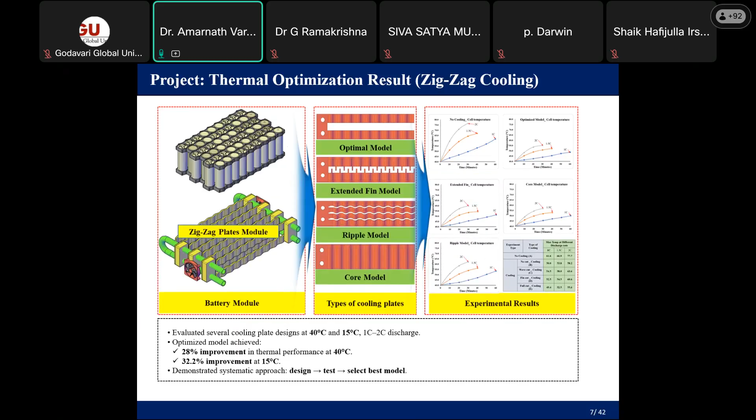Okay. And I also have one more patent, which is a cooling system, the battery thermal management system. Nowadays battery thermal management is the benchmark and backbone of the battery pack; we need cooling systems. I developed and patented this one. This is also a cooling system, a battery thermal management system.

Okay. And I also developed a battery aging prediction system. So you know, nowadays in Korea, I don't know about the India side, in Korea and some of Europe, battery aging prediction is divided into 2 types. One is the physical type, the other is the chemical type. Physical type means we check the battery charging, discharging, and DOD.

And coming to chemical predictions, we use the anode and cathode and check how they degrade. But these 2 methods are inaccurate. We can't give an exact prediction with these 2 because of complex loads. It won't work. That's why we are applying a new technology, the hybrid battery aging system. In this hybrid battery aging system, we adapt the physical and chemical and combine these 2.

So physically, we look at the DOD pattern, how capacity fade happens, and how internal resistance is rising. We identify the physical side, and on the chemical side, how the anode and cathode degradation happens. So we combine these 2, and then we can predict battery aging accurately and exactly. Okay.

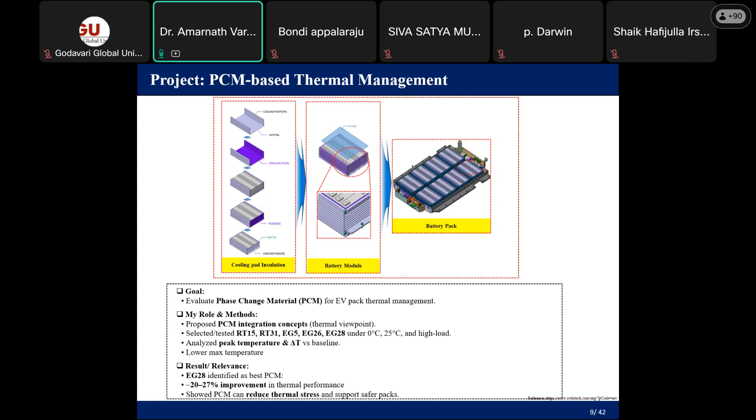And I also developed a micro mobility battery pack for two-wheelers. During my Indonesia MOU, I developed a 2.5 kilowatt battery pack, tested it, and we successfully operated this battery pack, and this project got an A plus. In this project, I developed a 2.5 kilowatt lithium ion battery with a thermal management system and high current density, to increase the mileage of the vehicle. That is our main concept.

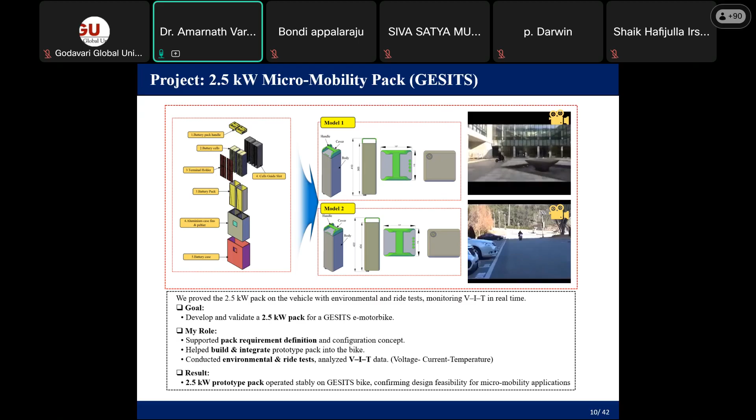Previously, the vehicle mileage was 50 kilometers, but we increased it up to 120 kilometers with the same battery capacity. That is our main technology. We implemented, developed, and tested this one.

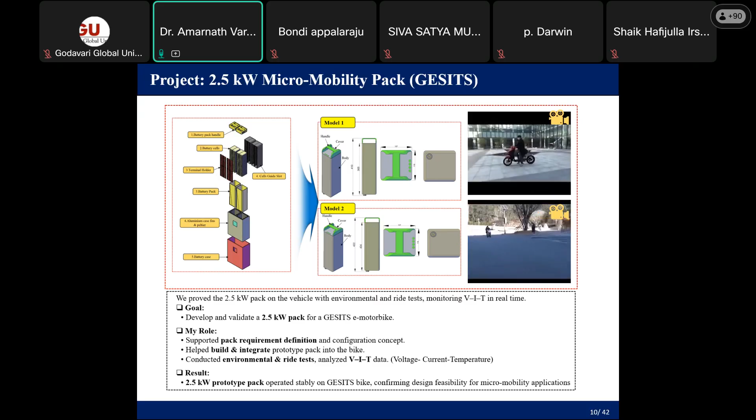So coming to some of my other projects. I developed the steer by wire. Steer by wire means there is no need for any steering column in between. You can see here, there is no steering column. It is operated by a wire only. We are operating by wire only. In this case, we can effectively prevent accidents and complexity. The main technology we are developing is steer by wire.

Then I have also developed advanced manufacturing, that is the KUKA robots, pick and place robot. KUKA robots we are operating for the milling operation. In South Korea, only we have this KUKA milling robot operation. In Europe and the USA they exist, but in Korea we are the first to operate like this. And also I have much more experience in reverse engineering. We are scanning the vehicles or any equipment, and then we can...

Sorry. Dear participant, please mute yourself. Okay, sir, you can continue.

No problem. Okay. So reverse engineering means we scan and develop the mesh, and after that we develop the real model. This is our main concept for this one. This is reverse engineering, so it is nothing but additive manufacturing. So I have good experience in additive manufacturing.

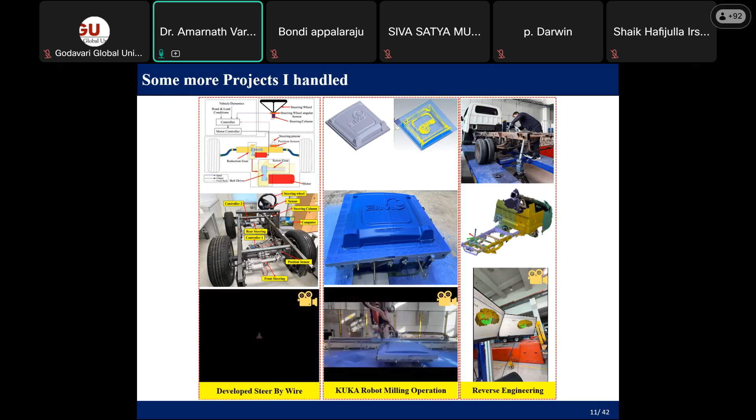And also I developed the smart fish farm. Nowadays most aquaculture is the earth pond type, but for the first time we are developing the vertical aquarium. I have a patent on this one also. Vertical aquarium means we are farming the fish tanks vertically, growing the fish, and there is no need for any human interaction with the aquaculture system. Humans can be away from the field, stay in another place, and monitor and control it.

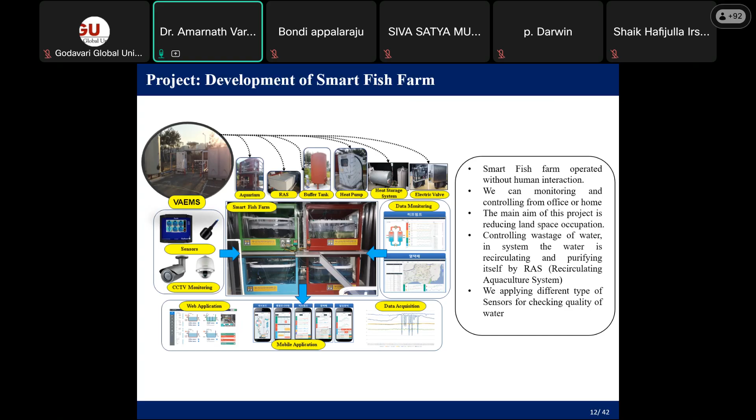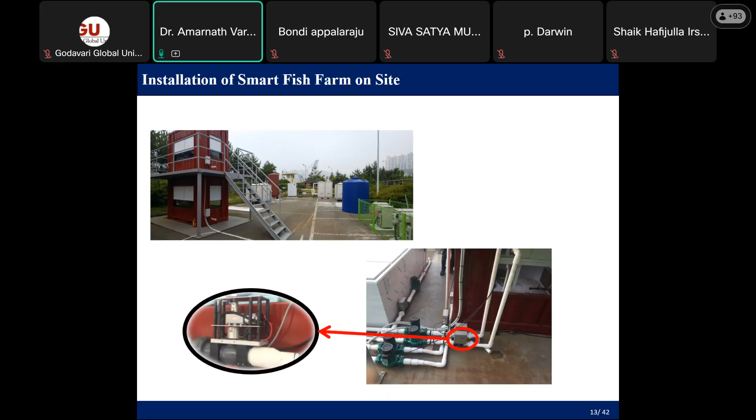For this we also got the A plus project. We successfully installed it on land provided by the government. We installed it, successfully operated it, and successfully finished this project.

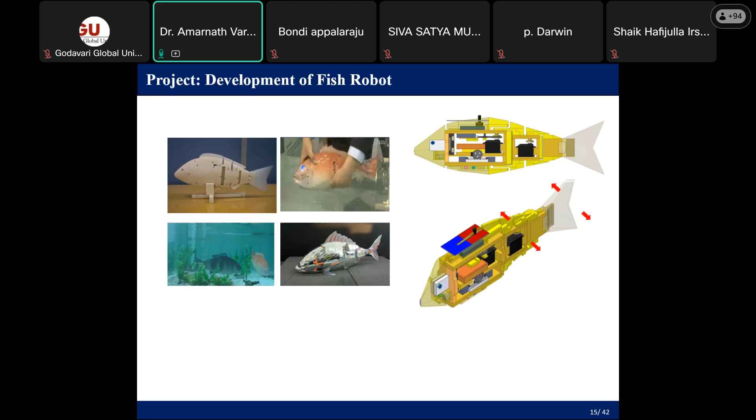And I have one more project: we developed the fish robot. The fish robot can monitor sludge or some unwanted things in the deep water; for monitoring purposes we have developed this RoboFish. Since my masters, with my colleagues and my professors, we have been developing these systems. Here we can see the fish motions. We are applying different kinds of technologies and algorithms for controlling the fish, operating the green band like that. Okay.

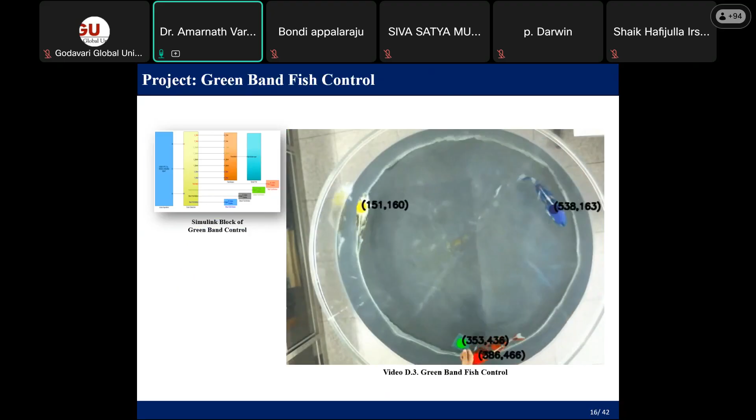So up to here, I explained my research work. Now we are going to electric vehicle technology, how we develop electric vehicle technologies. When we want to develop an electric vehicle, we need some important notes. First of all, define the purpose. What is the purpose for which we want to develop the electric vehicle? Either agriculture based, passenger based, special purpose, or heavy duty. So we should define the purpose, and after that select what type of vehicle we want. For example, what type of powertrain is very important: pure electric vehicle, hybrid electric vehicle, or range extended vehicle. Everything is different with respect to utilization.

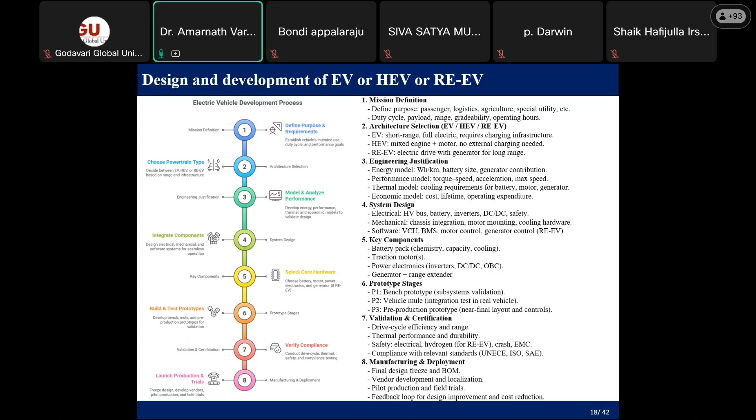Actually we are planning to develop a REV, meaning range extended electric vehicle. When we want to develop a range extended electric vehicle, first of all we want to know what it is. If you go for pure electric vehicles, they run by motors only, there is no other source besides the battery. When the battery is finished, the vehicle stops.

If we are going for the hybrid electric vehicle, it is nothing but it is run by either engine or battery. Okay, that is the main purpose we are using the hybrid electric vehicle.

So coming to range extended electric vehicle, which is nothing but it is purely electric vehicle, but we are always recharging the battery using the IC engine. So there is an IC engine. The IC engine is run. When the IC engine is run, it is attached with the generator. The generator will be generating the power. This power is going to the battery, then the battery drives the motors.

Okay, it is continuously running. When the battery is full, the engine will stop. Then it can be run by the battery. When the battery is going down, then automatically the engine starts. Then again the generator will be generating the power, then the battery will be filled. This is nothing but a range extension electric vehicle.

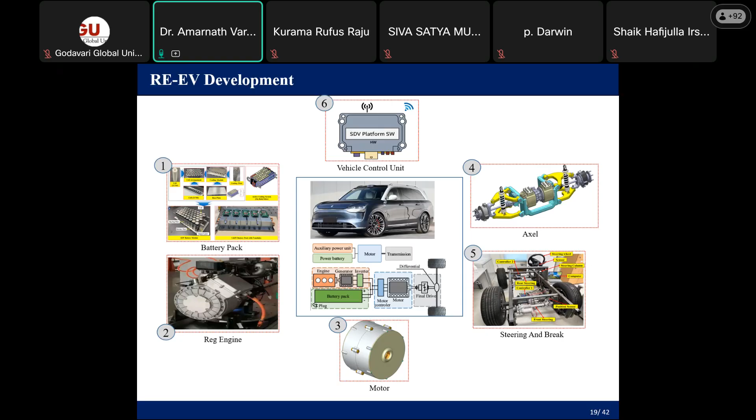So now I am doing this project in my company. Okay, so in this project I'm mainly participating in: number 1 is the battery pack, number 2 is the engine with generator, number 3 motor, number 4 axle, number 5 steering system, number 6 VCU, vehicle control units. So I will explain here step by step about these things.

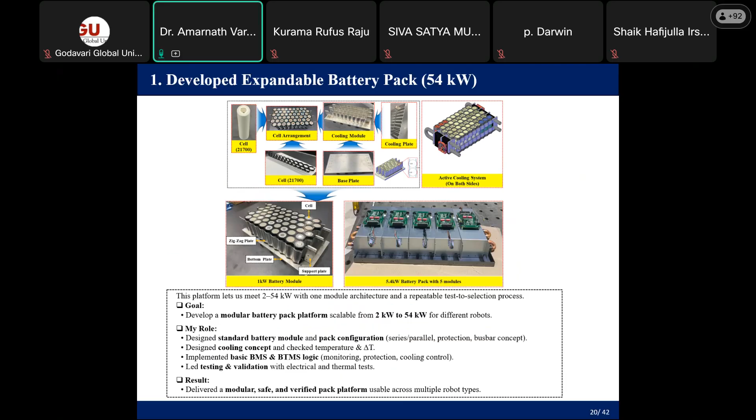Okay, so first of all, expandable battery. Already I explained previously about the battery pack. For this vehicle we are using a 54 kilowatt battery pack. So it is always filled by the engine. Okay, so next we will come to the second one: we are choosing the engine, that is the hydrogen engine. Why are we choosing the hydrogen engine?

So we know nowadays vehicles are classified into two types. One is the IC engines, another one is the electric vehicle. IC engine is running with petrol or diesel. This petrol or diesel is fossil fuel. This is purely run with engine. Okay, this causes pollution because it is operated with fossil fuel.

Okay, coming to electric vehicles, I'm using the hybrid electric vehicle. How is the hybrid electric vehicle operating? A hybrid electric vehicle has a battery and also fossil fuel. Then it has an engine and a motor. It also has some pollution because it is sometimes run by the engine. Coming to plug-in electric vehicle, plug-in electric vehicle is also like a hybrid electric vehicle.

There is no difference. Okay, if you are going for the electric vehicle, it is purely run with battery and motor. It has no pollution, but it has some restriction on the mileage. We can operate only some restricted distance. So if we want more, we should recharge. Recharge means, sorry.

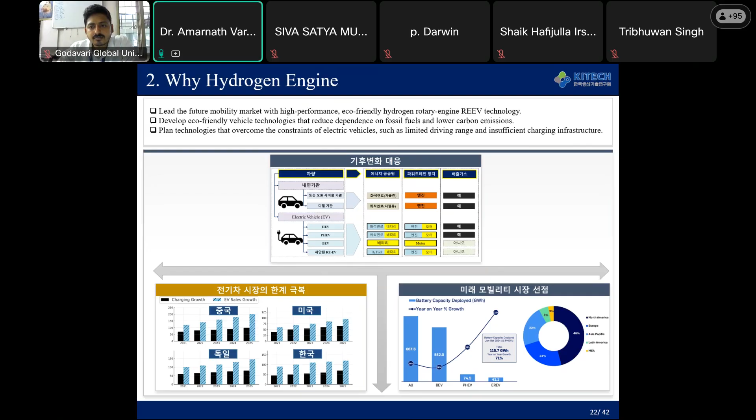Okay, so first of all I will give why we are using hydrogen. For example, IC engines use fossil fuel. It can be depleted anytime, and the output is nothing but carbon dioxide, which can be harmful. Compared to an electric vehicle, the combustion efficiency is only 25 to 30 percent, so we are wasting most of the fuel in this case. The remaining goes to exhaust as CO2. So if you are coming to hydrogen fuel, it can be zero pollution.

Combustion efficiency is 60%. Also, noise and vibrations are very low. It can be sustainable renewable energy. That's why we are going for this here.

Then we have another question. Some people may be thinking, why are you using the rotary engine? Rotary engine is not good for efficiency, mostly they are thinking like that. No, if you apply the rotary engine with the most load and long time, it can give bad efficiency. But if you use less load and less distance, less time operation, it is very powerful and gives very good efficiency compared to IC engines. That's why we are going for the rotary engines.

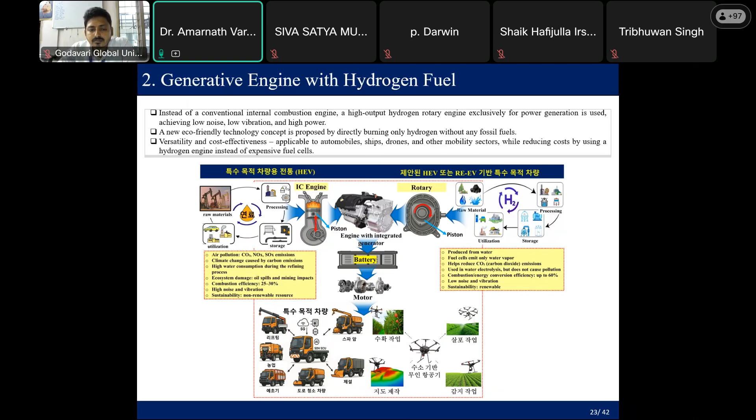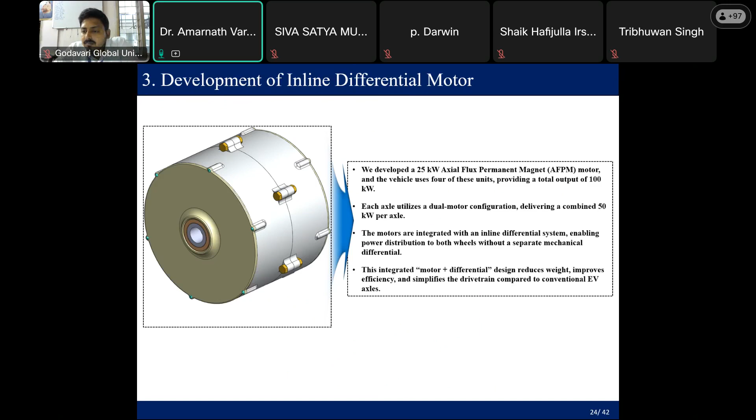So number 3 is the motor. This motor has some special features. Nowadays a motor is nothing but we develop the stator, rotor and shaft, and connect it to the wheel. No, this motor is purely developed with inline differential. Inline differential means, as you can see here, there are 2 motors.

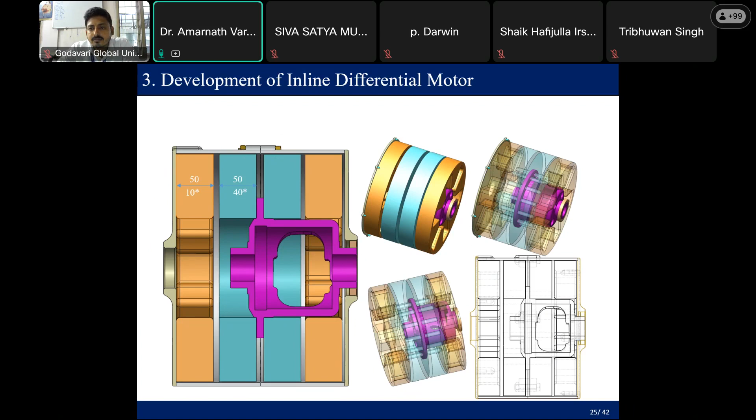This is the stator rotor and the stator rotor, there are 2 motors. This is 2 motors with differential, meaning the complexity is very less, and it can also give very good efficiency compared to the normal differential. That's why we are developing this inline differential motor.

We have already developed this one. You can see this is the inline differential, and this is the differential motor. I won't show my motor here because of some company restrictions. I will only show some rough things.

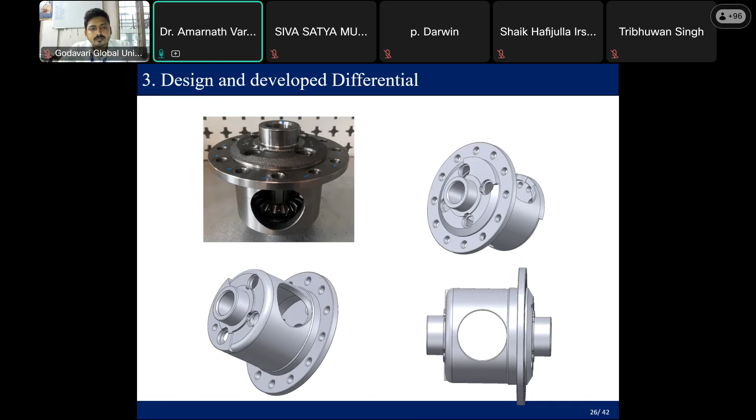After that we can go for the axle with suspension. We have 2 types of axle here. Model 1 is the reduction gear and motors, which we normally use with the double wishbone suspension system. The other type is our inline differential motor. This is our model. We have developed these 2 models now, and they are under processing.

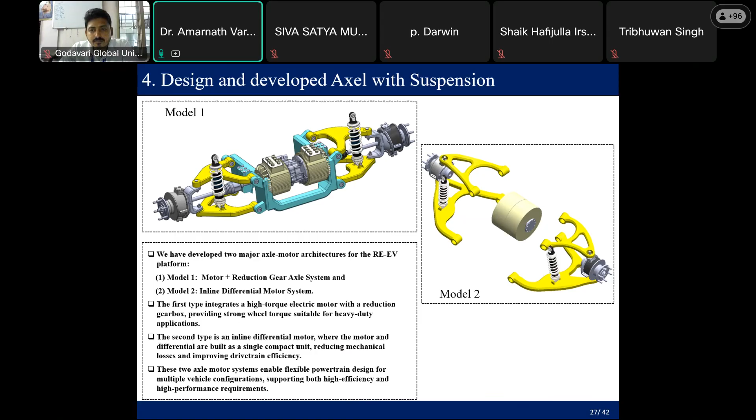Then number 6 is VCU, vehicle controlling unit. This is a very important and hot topic nowadays. This vehicle controlling unit is adapted with SDV, meaning software defined vehicle. What is the software defined vehicle?

We know that every day in human life we use mobile phones. What is the purpose of the mobile? We use mobile for contacting other people, for camera, gaming, calculators, movies - everything we use the mobile for. Meaning one phone, different applications. There is one phone, but there are different applications.

Like that, we are coming to common hardware but multi functions. For example, sometimes I'm using the ladder type, sometimes I'm using the 3D printing type, sometimes agriculture purpose, and sometimes woodcutter. So nowadays mostly these special purpose vehicles, each function requires each vehicle. In that case, every function requires one vehicle, but our technology is one vehicle, multifunction, meaning we can reduce the quantity of vehicles while the functionality of the vehicle is huge.

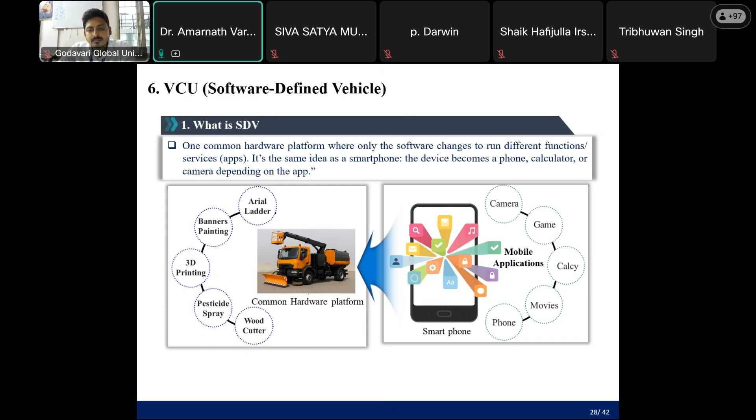That's why we are developing the software defined vehicle. Software defined vehicle means the hardware is the same but the functions are different. So what type of functions are common in this?

The common platform is used for hardware standardization. We don't use multiple hardware for multi functions, it's just a software API standard. For example, we have different apps, I want to use it for gaming, I just install one app and I can play games on my mobile.

If I want to use a bank account, I can install a bank related app and use it for bank purposes. Similarly, if I want to use it for a sweeper, I just install the sweeper related app.

Just a small hardware change is needed. For example, for a sweeper, we can attach some motors, that's it, and it can operate as a sweeper. Like that, and it can always be used.

OTA. OTA means we can communicate data with the vendor and the vehicle, they can communicate data.

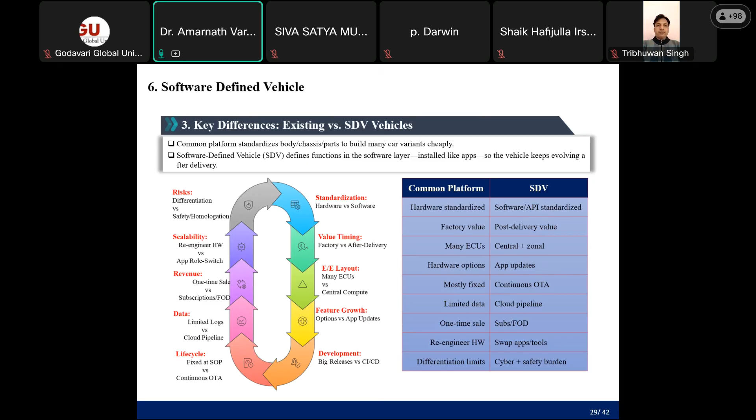Coming to this, software defined vehicle, why we are making special purpose vehicles, as I said previously.

Normally for ladders, commonly two people are used. One person stands on the ground and another person is on the ladder. The ladder person gives instructions to the ground person, please move left side or move right side, you can move up.

It can be some strange situations. Sometimes he operates wrongly, then it can be a hazard for the ladder person.

So if we update this with SDV, software defined vehicle, it can be operated by one person. There is no need for an extra ground person. He can monitor and use the joystick for everything. He can operate and achieve the target very easily. That is our main thing here.

Also, one more thing is reducing the risk. How do we reduce the risk? Actually every ladder operates at a certain height and certain angle. If it goes beyond this angle, the load is undistributed, and it can fall down.

But when you update this with software defined vehicle, it can be restricted to a maximum height, and restricted to the required angle. More than the required angle it gets restricted, more than the required height it gets restricted. So within these parameters we can use this.

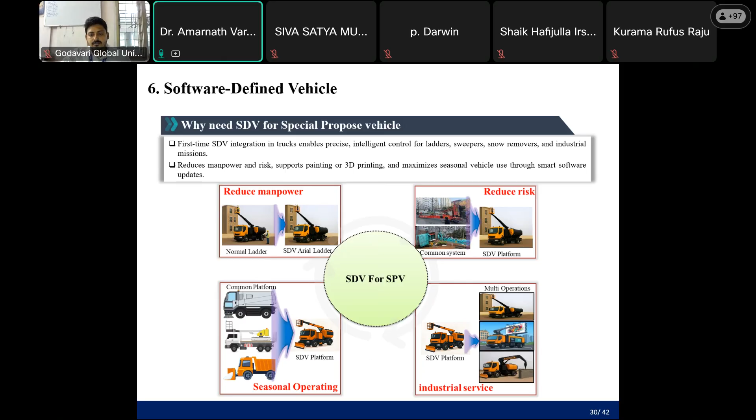From this point of view, some people have questions: how do we update the program? For example, I have...

So OTA means nothing but, over the air, we can communicate with the vehicle. When needed, the customer updates the app in the vehicle via the mobile, then it automatically integrates with the vehicle, then it communicates with the VCU.

The VCU will be collecting this information with respect to what we require, and the program will be automatically established in the vehicle. For example, you can see the basket here - we can remove this basket and just paint spray here for paint work. If we need the printer, we can remove this sprayer and replace it with a print nozzle, then we can use it for 3D printing. That is our main technology we are developing here.

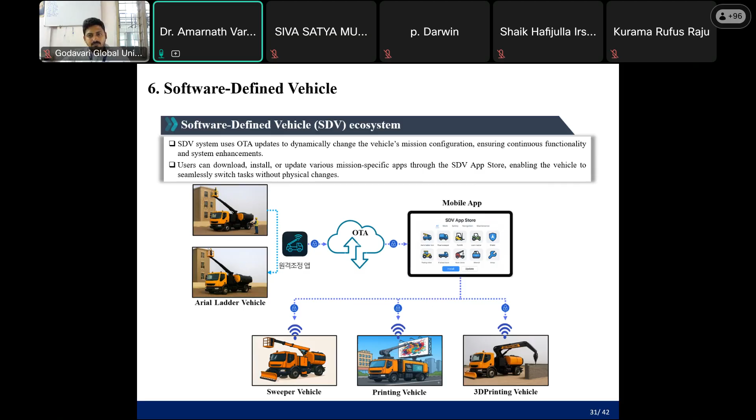Now how VCU is working. Vehicle controlling is nothing but integrated with the app developer, manufacturer, customer and hardware. When the app developer is developing apps, the manufacturer gives commands to the app developer.

They need to develop vehicles with respect to sweeper, ladder, printer and painter. This requirement is provided to the app developer, who develops a program related to this. Then the customer operates with respect to what is provided, updating these things, and they operate the vehicle.

So when this vehicle is operating, the manufacturer will be monitoring this data - how the ladder is working, its life, the spray nozzle life, how the sweeper motors are working, and when using the paint, how the paint arm is working. All this data is monitored by the manufacturer.

If there is any problem, for example the life of the ladder will finish, they will update the information to the customer so they can take the vehicle for service and re-upload or utilize it. Also when the vehicle is upgrading, the manufacturer provides information to the developer, who takes instructions from the manufacturer. With respect to this, they can update the vehicle with different types of things. So everything is run by the VCU, the vehicle control unit.

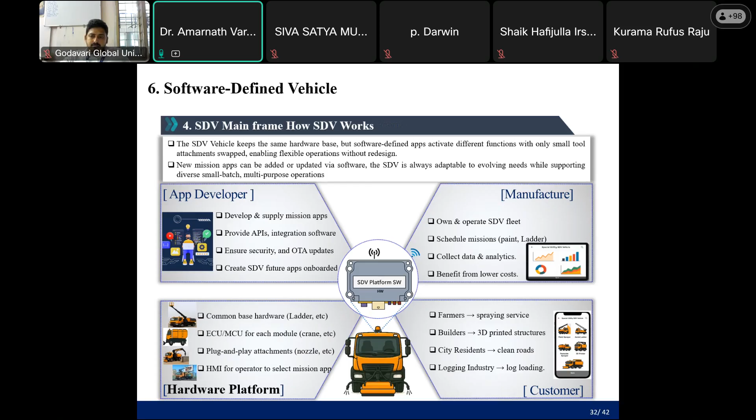Now how the main frame is working, you can see here. The app developer develops what the customer and manufacturer provide, and then the customer operates these things. When the customer operates the app, they can execute it for these vehicles.

So when the vehicle is executed, the sensor data goes to the manufacturer. They can monitor, analyze and update it. If there are any issues, they send a message to the customer, who can take it to the service station where they rectify the problem and continue using it. At that time the vehicle will also be upgraded.

This year we are using an AFPM motor, and next year they can use it to improve the power. Nowadays they use 2 kilowatts, next year they are planning to use 5 kilowatts. Then this data is provided again to the app developer, who implements these things and provides an updated app. Then our customer updates this app and reuses it. That is the main function of this SDV.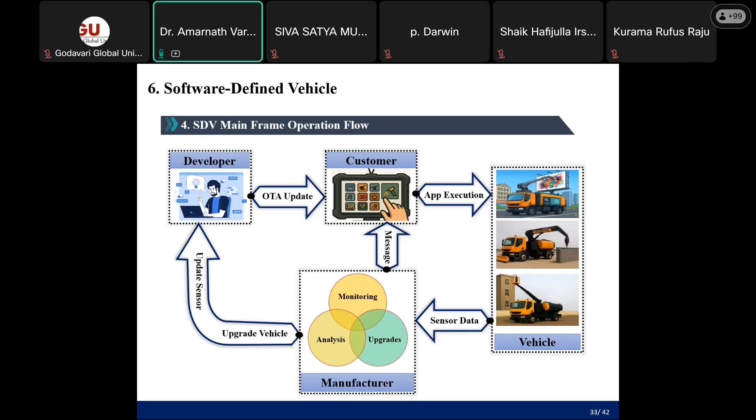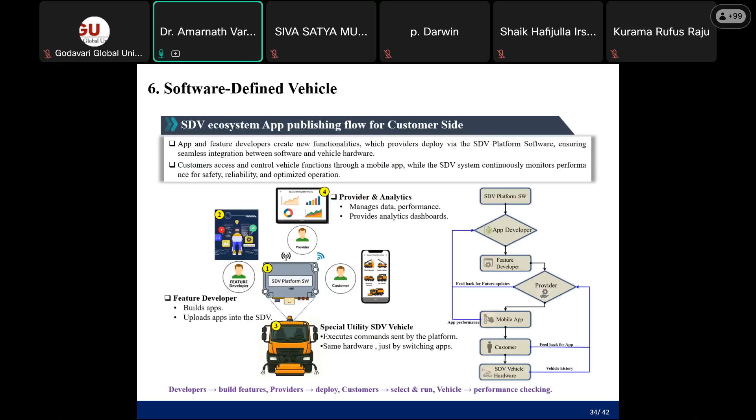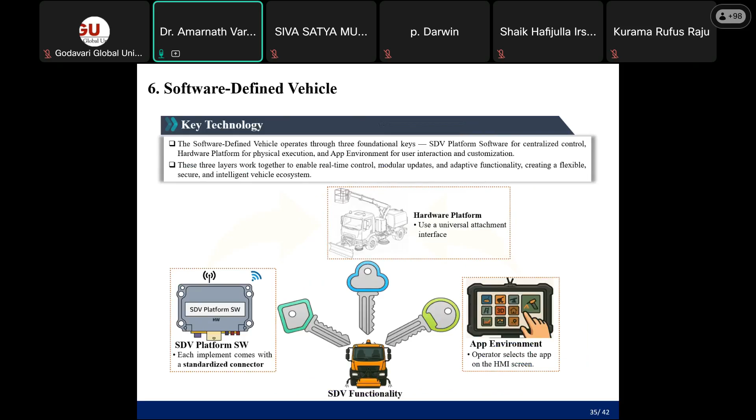Previously what we saw was the client side. Now this is the developer side, how the developer is working - same function as explained previously. In the SDV there are main key functions: number one, development of the software development platform, SDV hardware, and the app. These three are very important for this technology.

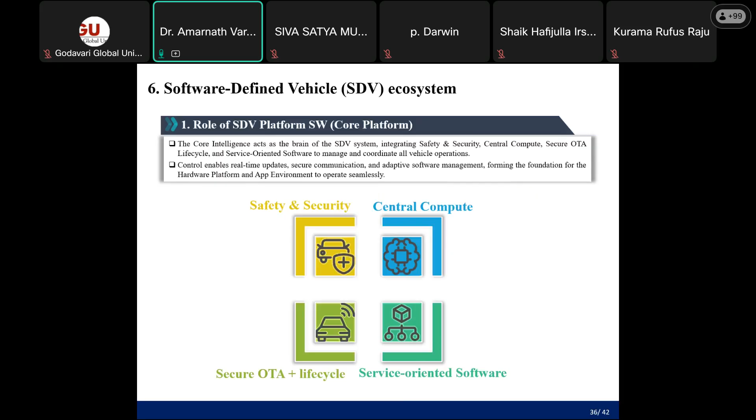Coming to the software defined ecosystem, what we want to do in this system is provide security, centralization, and service-oriented software, along with secure OTA. We can also estimate the life of the vehicle here - this is the role of the SDV platform.

After that, a very important thing is the motor controlling units. Commonly nowadays, if you are using things like a ladder and everything, they use different motors, different switching units, and different controllers - each joint has one motor, one controller, one switching unit. The VCU cannot modify this controller's programming because each controller has a dedicated program. So if you want to change this, you need to change the entire motor, controller and switching unit.

Okay, but our plan is this: this is the normal model, but we are applying it for the SDV. In the SDV technologies, we are using the VCU directly controlled by one controller. This one controller can control the switching and motors. It means we can always modify it under a rechangeable and rewritable program with respect to the VCU, because of commanding the VCU with the controller.

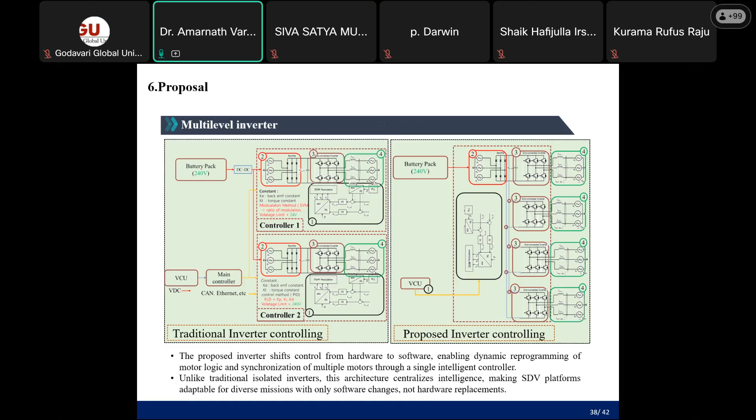Okay. So here we have App Core technology. Why we are using the app technology means we are developing some applications for the Android and Google Play stores. Okay, and we are developing the operating systems, we are developing the OTA with respect to the cloud system, we are supporting the driving technologies, we are developing the app, and we are providing the cyber security for this technology.

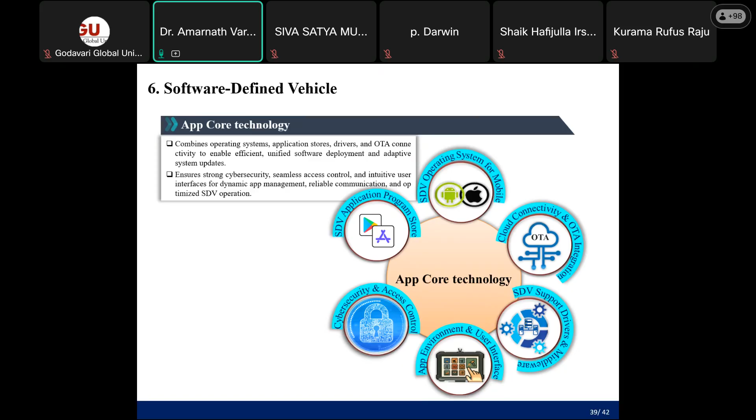And this is how the software-defined vehicle integrates with insurance and government. For example, nowadays commonly used vehicles are not providing any security because they are just utilized by themselves. There is a risk. For example, ladders can operate at a certain height, but if they are used beyond that height, an accident can happen. So in this case, the insurance people will be worried about providing insurance for this kind of vehicle because there is no proper security.

But if they update to SDV, it will not operate in the worst conditions, and beyond the required height it can't work. So the insurance people will be satisfied because it works under safety constraints. That's why the insurance people will adopt this technology, and the government also provides some benefits for this technology because it provides safety. That's why they can easily provide subsidies. And also we are providing service maintenance and customer value. These are the main things under this technology.

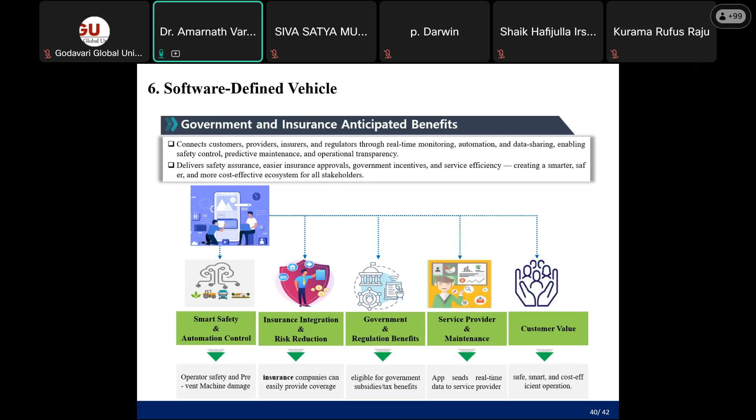Okay, so we are planning to implement this for the Benz Unimog vehicle. We are already planning to implement these technologies on this vehicle. Now it is undergoing processing and we are doing this project.